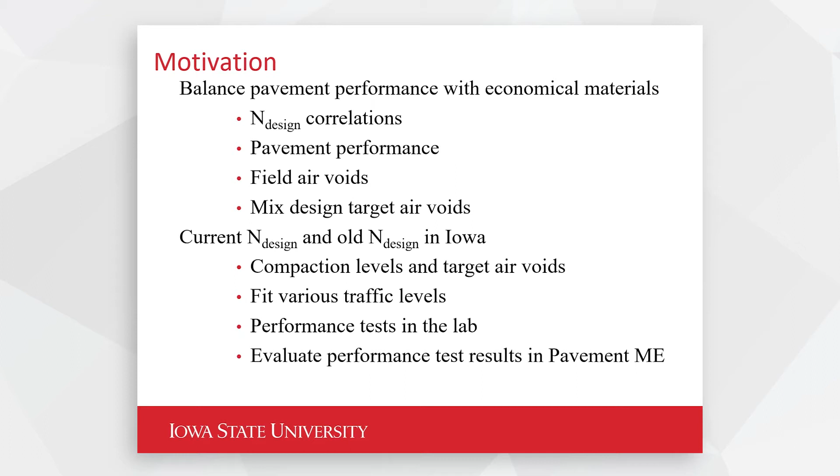We changed the design criteria in 2016, and those mixes were not going into effect until 2017, a bit somewhat, but more in 2018. We were also looking at, concurrently, the DOT evolving the asphalt binder grading criteria.

This kind of summarizes the grading criteria. We have a mistype here in the table - the north and south in the brown areas are flipped. Of course you'd have a lower temperature grade binder in the north, and a warmer grade binder in the south. US 30 is kind of that dividing line between north and south in the state of Iowa.

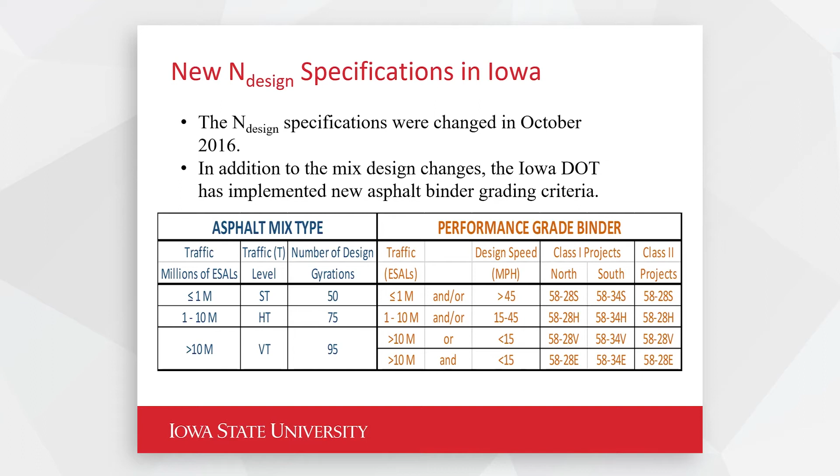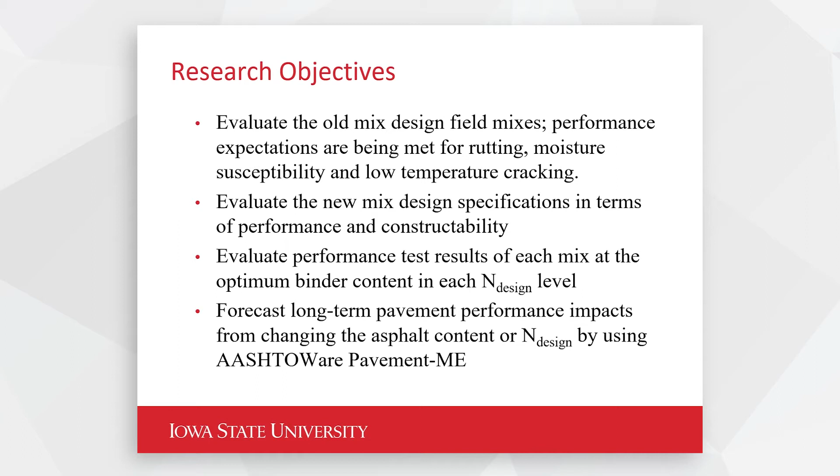As I mentioned, we're evaluating these different mixes for rutting, cracking, moisture susceptibility, and then determining how this looks in Pavement ME.

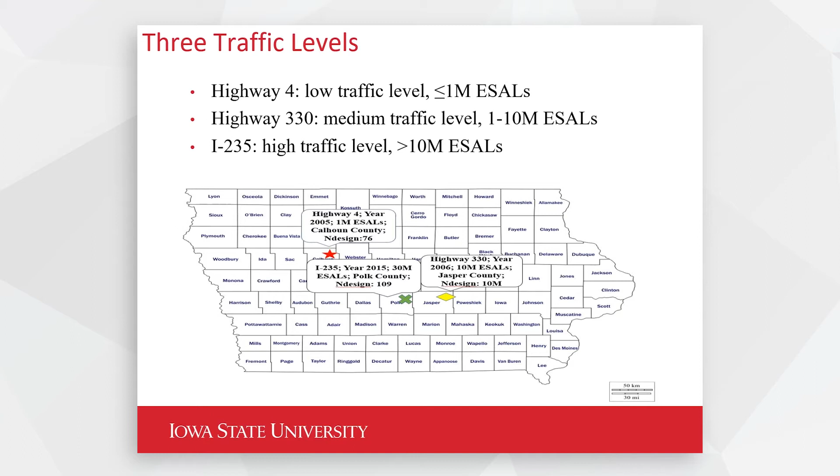As I already mentioned, we're looking at Highway 4 as a low traffic level of less than 1 million ESALs. You can see Highway 330 is the medium, and I-235 was the higher level. This was kind of the representation of where these mixes were placed.

Again, we're using compaction criteria of designing to 4% air voids. What happened was we reduced the number of compaction efforts. Overall, with the old design, as an example on Highway 4, the optimum design was 5.5, with the new it was 5.7. So overall, the three different mixes, we did see an increase in the asphalt content - not quite as much as we had anticipated. We would have thought it would have been more like in the order of 0.4% or thereabouts, but nonetheless, we did see an overall increase in the binder content.

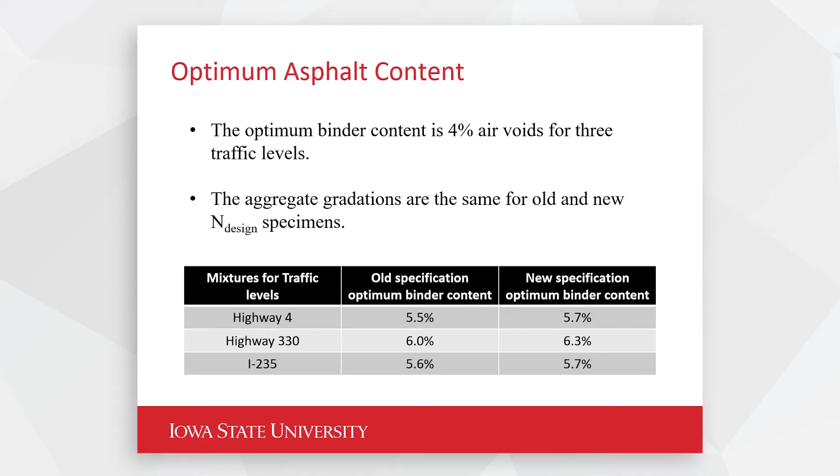So for the different performance tests, it's pretty extensive in terms of dynamic modulus, getting master curves, flow number tests for rutting, Hamburg wheel track testing for rutting and moisture damage, disc-shaped compaction tests for low temperature cracking, and then beam fatigue tests for fatigue cracking as well.

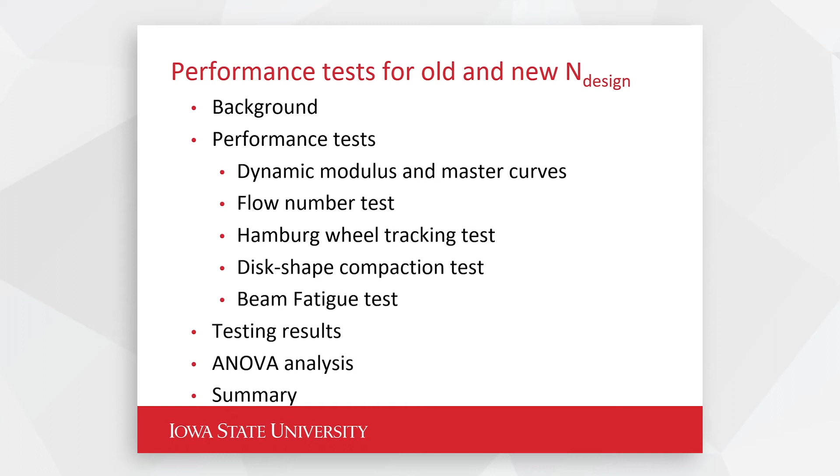Finally, we were looking at doing some analysis on the results, and then after that, we were doing some Pavement ME analysis. We won't go into all the details of how we attained the optimum binder content - that's fairly standard at this stage. But what we can do is highlight the new design levels.

As an example, on the low volume roads where it's less than 0.3 million ESALs, the gyration effort was reduced from 76 gyrations to 50. We see this as a more consistent compaction criteria, and we anticipated seeing improved performance.

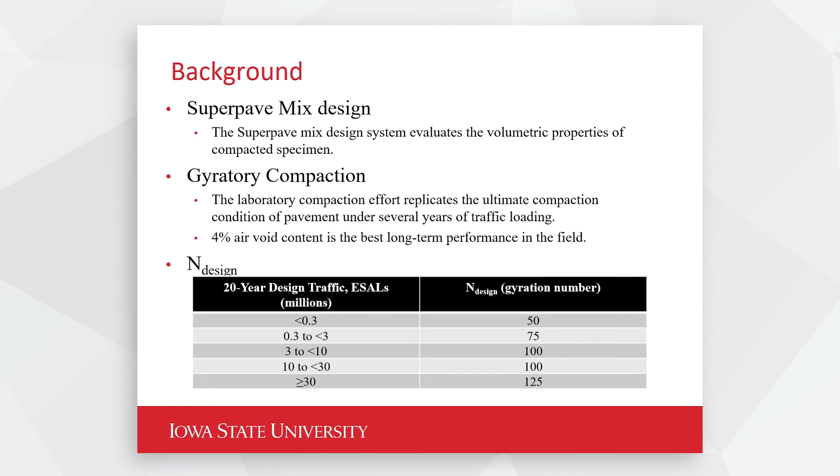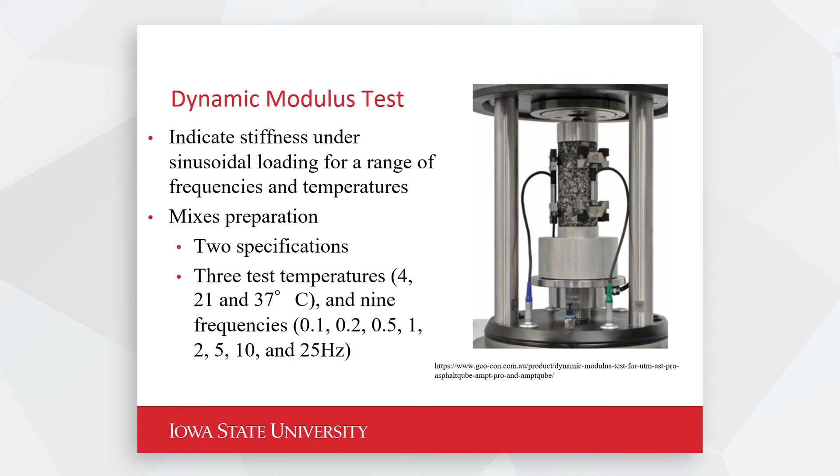The first test is the dynamic modulus test. It takes a lot of effort to prepare the samples and then conduct the tests.

To summarize things, we seem to have better dynamic modulus values on all three mixes.

They were statistically essentially the same for I-35 or I-235. And you would think that that would probably be true since we only changed the binder content by about 0.1%.

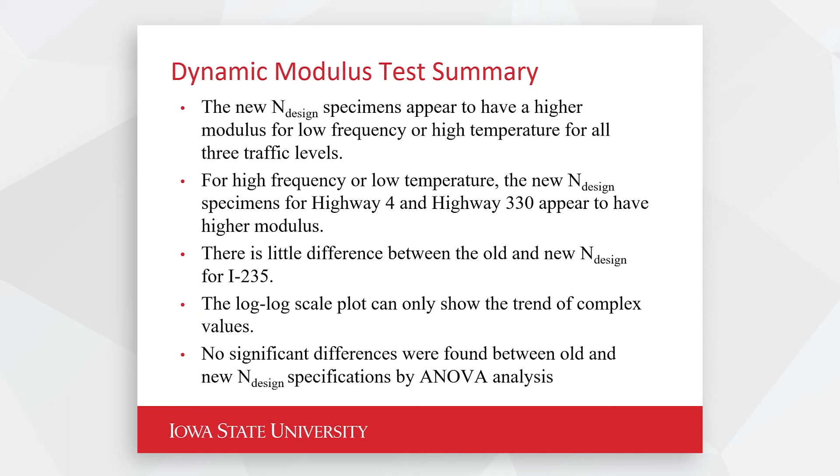So we can go to the flow number test, again for rutting resistance. You can keep flipping through to the bar chart. Now this is where we're not seeing statistical differences per se, but there's clearly a tendency for the new design criteria to have better performance. The blue is the new and the orange is the old. Although there's not quite a statistical difference on 235, you can see clearly there's a preference for the new design criteria. Interestingly enough, just a tenth of a percent binder change on 235 did lead to quite a bit of improvement in rutting resistance in terms of flow number.

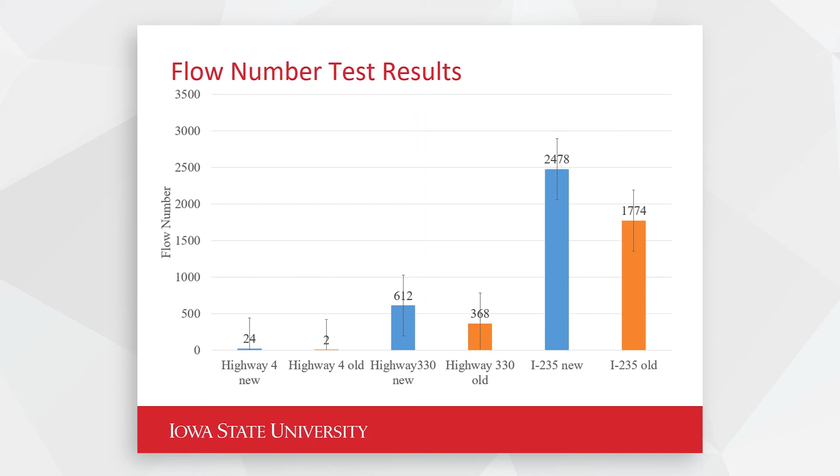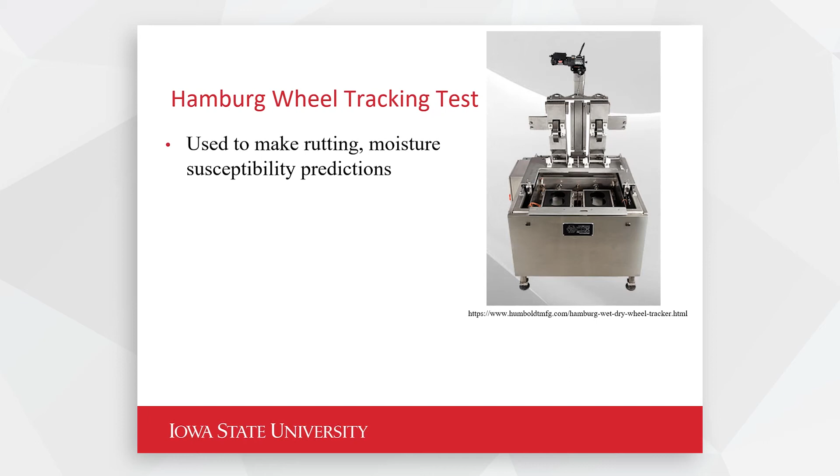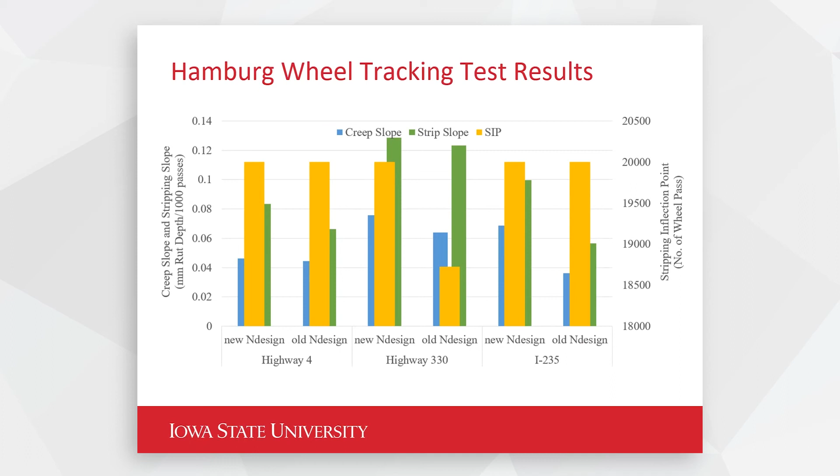If we flip through there, we have all the analysis of variance and stuff in the report. We next go to the Hamburg device. The Hamburg is pretty much a standard test in Iowa, and so we look at rutting and moisture damage in the Hamburg, and we have a bar chart here. Basically, we're seeing whether it's the stripping slope or stripping inflection point, the new design is providing equal or better performance in the new compaction criteria than the old.

We can go to the next slide and see it. We did find a rather significant difference for both Highway 330 and I-235. The new design criteria is certainly better, and we're not compromising performance on our low volume roads.

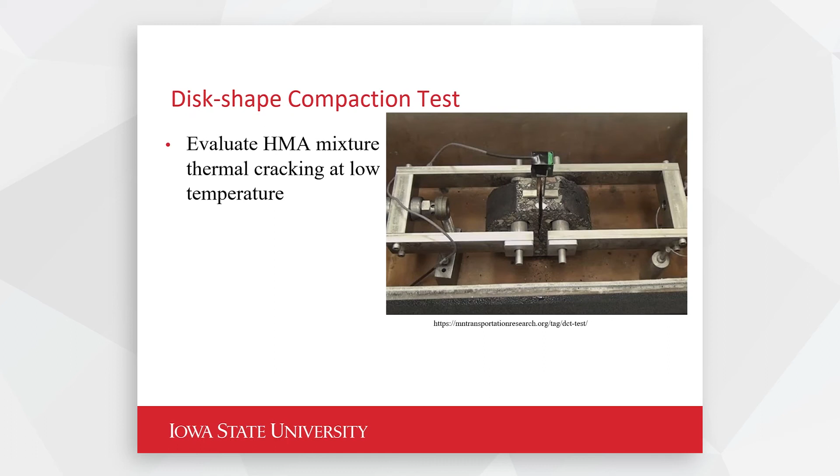The last performance test we ran was the disc-shaped compact tension test for low temperature cracking, and we can see the DCT results on the next slide, where whether it's fracture energy or peak load to fracture, we see improvement there.

What gets interesting here is we generally want to see our criteria at 480, 490. The threshold is shown there in red. We're now moving up and getting close to attaining that with the I-235. Keeping in mind, this was under the old binder specifications. So with the new binder specifications, we would anticipate the performance further improving.

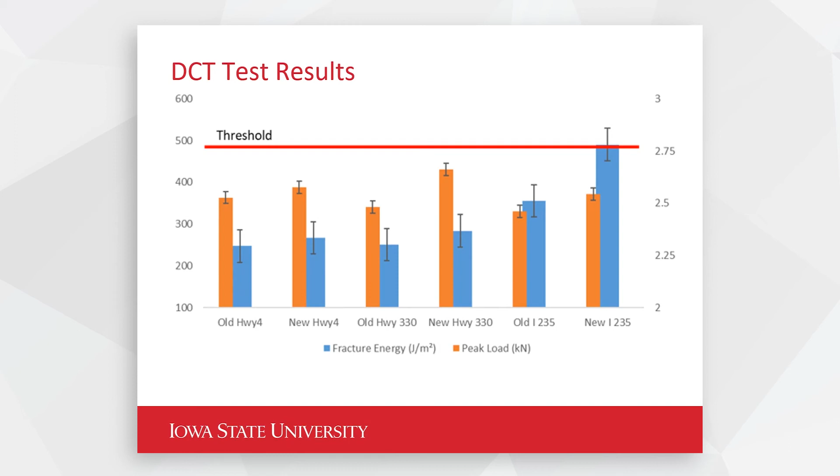Next slide. Again, on these test results for the DCT, we see substantially better performance. And we believe that with the newer binder specs put in place, the performance would be even further improved.

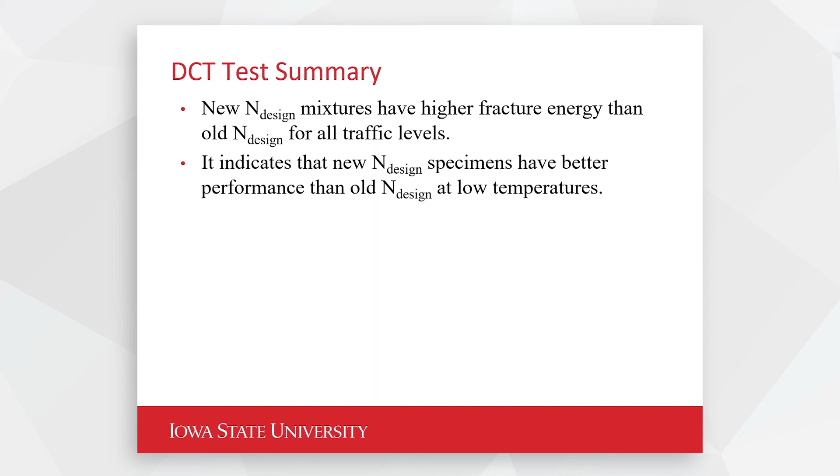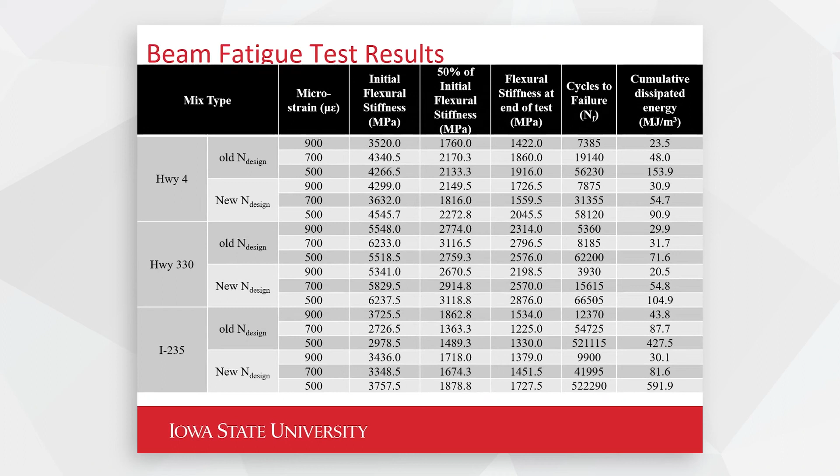The last test, which is more of a research device, is the beam fatigue test. We do use this for interlayers, but other than that, it's mostly a research tool. We can go to the next slide. This is a table of values. Probably the more informative slide is the one showing the graph with the paired results. Generally speaking, we're seeing the fatigue results of the new design is better than the old design. So it's not a big surprise that we would see improved fatigue performance by putting more asphalt in our mixes. That would be somewhat expected.

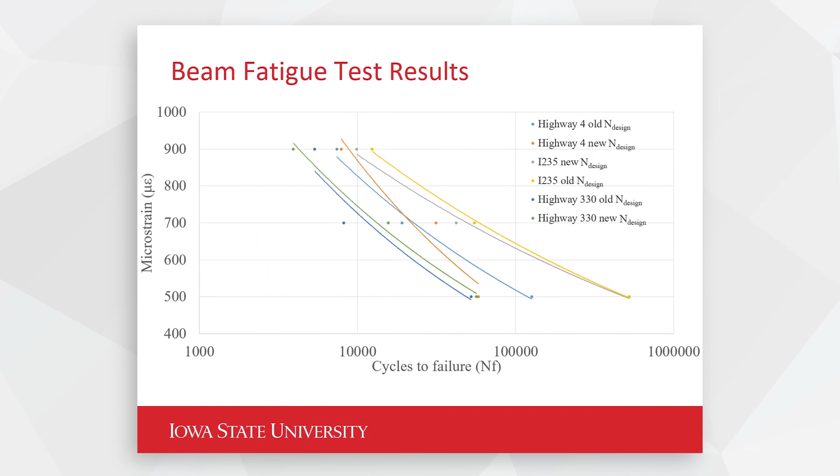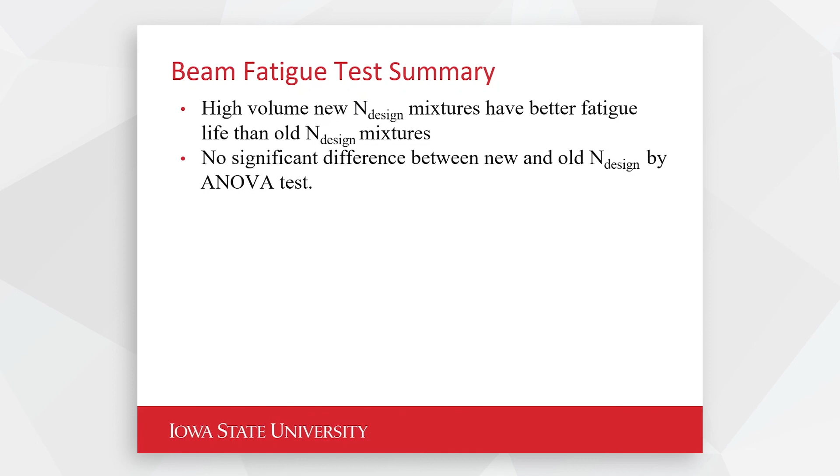I think we're seeing better fatigue performance in our mixes, basically, and it's not supported by the statistical analysis. So the last set of criteria we used to evaluate the compaction criteria was the pavement ME, and we wanted to see how pavement ME simulations would anticipate long-term performance.

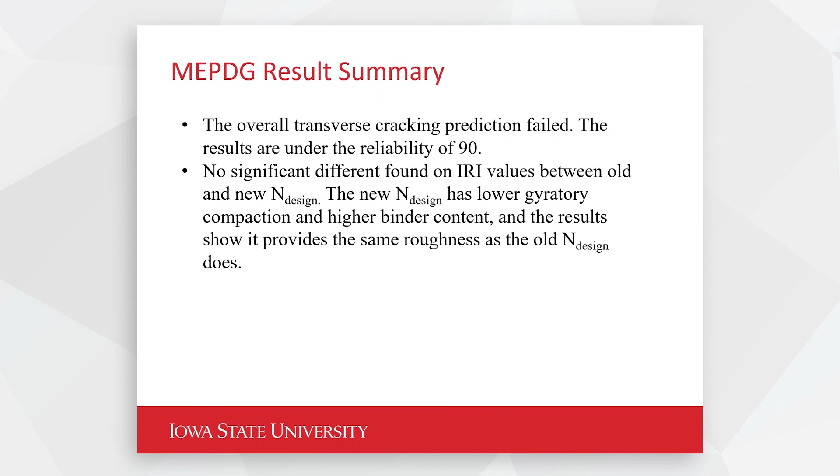We go to summary of this. The overall transverse cracking prediction in pavement ME was not being met, which would tell us that we need to have better binder criteria. We hope that with the improved binder criteria, that criteria would be met. But we didn't have the right mixes because they're much older under the older specification to evaluate that.

But overall, the ride quality between the old and the new was statistically the same. And we didn't see any differences for fatigue cracking in the simulations for pavement ME. And we didn't compromise rutting. The rutting was essentially the same and was meeting our performance expectations.

So overall, in the project, we demonstrated that the mixes were performing equal or better, and generally had a tendency to be performing better under the new compaction criteria than the old. The one caveat is in terms of the transverse cracking, which would be related to low temperature cracking, we see that was kind of an area that needed improvement, and we believe, though not confirmed, that the field mixes would be meeting or exceeding that criteria now with the newer binder specification put into place.